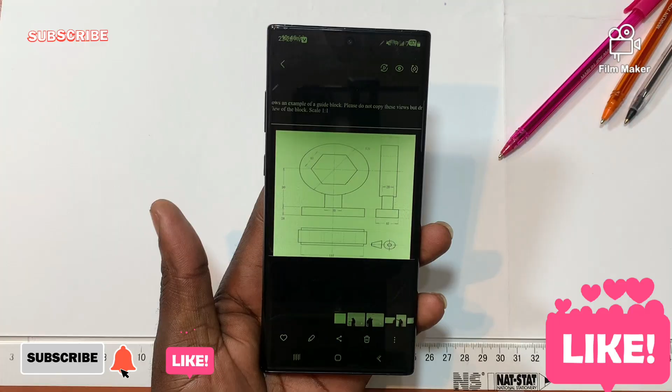Unfortunately, I didn't manage to get the printout on this particular one. So this is isometric drawing.

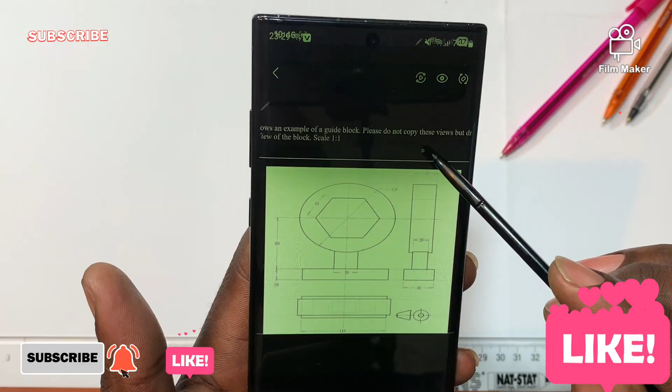We are given 3 views, so the complete 3 views, you understand? According to that symbol, this is the first angle orthographic projection symbol, which means that's your front, your left, and your top. Even the question says figure so and so shows an example of a guide block. Please do not copy these views, but draw this view to scale 1:1.

You understand? But what is very much important here is the scale. They are saying draw it according to which scale and the projection symbol. So the scale is 1:1. Even the dimensions, I will try to get them clearly.

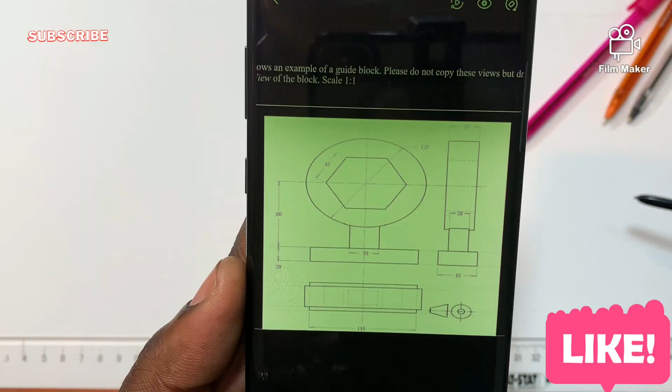So let's start. In isometric, you start with the horizontal construction line like this, out of dimension, isn't it? Then followed by another one perpendicular against it, just a little bit like this. Then where they are perpendicular to each other, that's when I can put this one.

Remember that your t-square must always run along your drawing table, isn't it? Attached, flashing like this, not like this, not like this. Understand? So that the set square must always run along your t-square, whereas your t-square is fixed to your drawing table. If you are using a drawing board, your t-square must always run along that junction of it. It's supposed to be always there, so that the set square can relax on top of your t-square.

So I'll flash down my t-square, and then my set square, I open at angle 30 degrees clockwise. So where they're perpendicular to each other, I'm gonna get this line, faint, and then I am getting this one, faint. So that's how you start to draw your isometric.

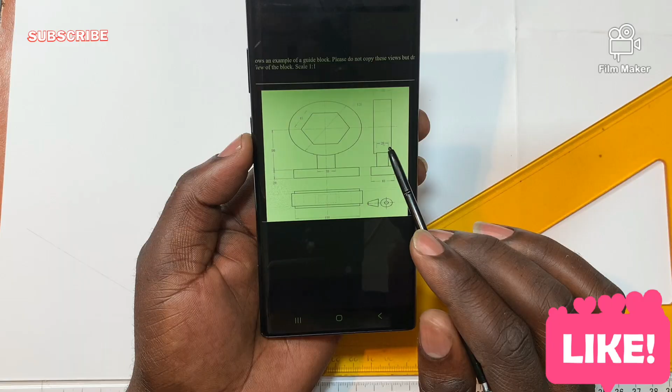Okay, so let me bring back my question. Are they talking about any point being the lowest point there? No, they are not. Okay, so this is my front, this is my left, isn't it? Which means I have to get a shape that is like this way, right on this position.

This position, I must try by all means to get a shape on this position, which is going to be my left view. You understand? So what separates left from right here is the vertical center line.

You understand? So again, on this side, I must try by all means to get a shape of this nature. This shape, I have to get it away on this side, of which they said is your front view. You understand? So that's how you approach a first angle orthographic projection as an isometric.

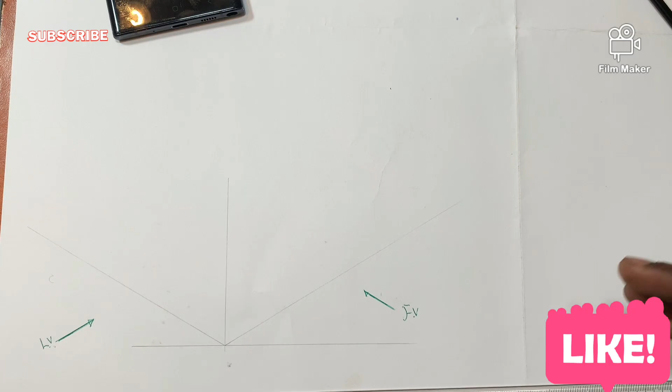Okay, so now I can start with what? So which means with all the dimensions that I'm gonna record from my left, they must be correlated this side. You understand? All the dimensions from my front, they must be correlated this side. And you must know that the front as well as the top will always share the same length.

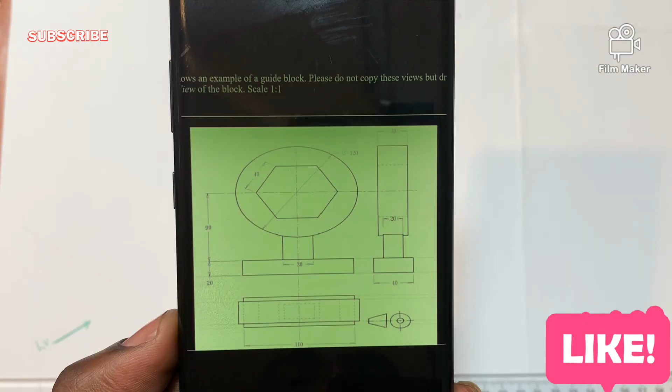So if I'm looking for a dimension going horizontal, I don't see it there in my front view, which means I can go to my top. For instance, from here to there, you see I'm pointing it away. I'm pointing on the front view. So from here till here, it seems to be missing. So I can retrieve that dimension right from my top, because this is front, this is top, this is left. So all the dimensions going horizontal, they will be sharing the same dimension altogether.

So the front as well as the left will always share the same height. You understand? So the left as well as the top will always share the same breadth or width altogether. So I can start how?

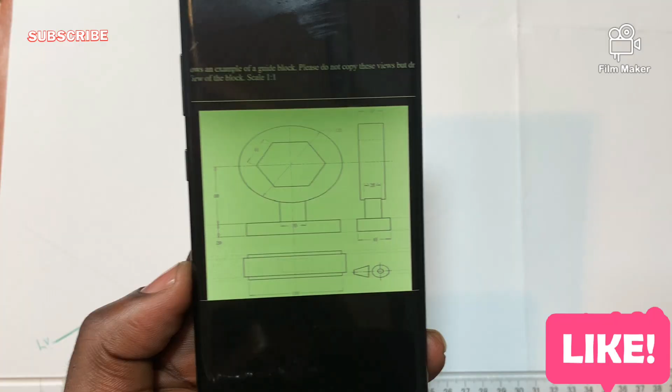I can start with my left, which is 40. From here till there, I now come and record the 40 millimeter using scale 1:1, and it's solid. I can see it's solid, so I can draw it up from here till right there. There is the 40, isn't it? Once I reach 40, what do I see?

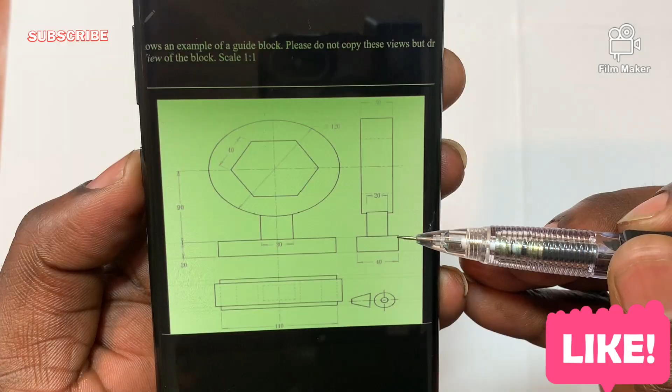Now I see a vertical line going up, which is going to be this one, just a little bit faint, and then up till with a height thickness of 20. So do you see that it's not here the 20, it's not here the 20. I'm actually reading the 20 from my front. So like I've said, the front as well as the left will always share the same height. So it's 20 millimeter.

So this 20, I can record it from here. There's my 20 till here. Then from there, I can simply take this ruler and have a constructional line going this side. Then I draw it down from here to right there, to right here. That's my 20.

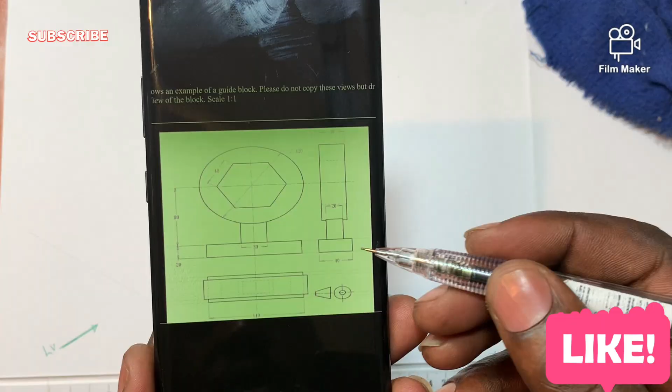So in other ways, I've already gotten this. And then from here till here is how much? Is 40. Let me get to the center of it, the center of it, which is 20. There's the 20, and then I project it vertically up.

So these lines, I don't need them this much long now. These ones and this one, I can erase them before they disturb me. I can erase you, I can remove you.

Okay, so from there, now I'll take this point at an angle of 30 anti-clockwise. Take the center. This one I'll draw it a little bit faint for now, the center. Then I also take this point like this.

So now do you see that I'm going towards my front view? Which means in the question, you can now come and bring it the question. What is the length of it? That's it, it's 110. So from here till here is 110.

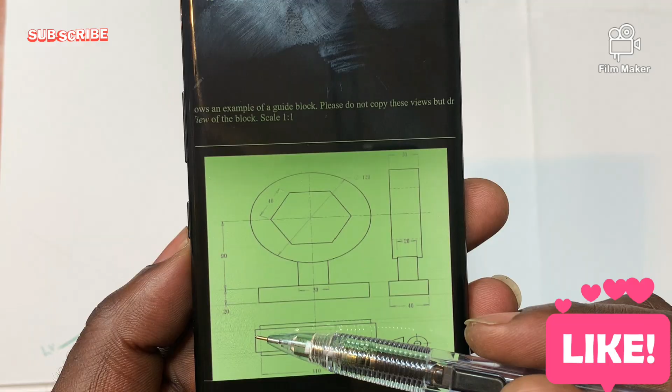And double check what is this one. What is that one? Remember, is your top. You are now viewing it on the top. You can actually see that the 110 is a little bit - there is a dimension that is a little bit going further beyond where your starting point and further beyond you, at the end of your 110 angle. So that one is that diameter 120.

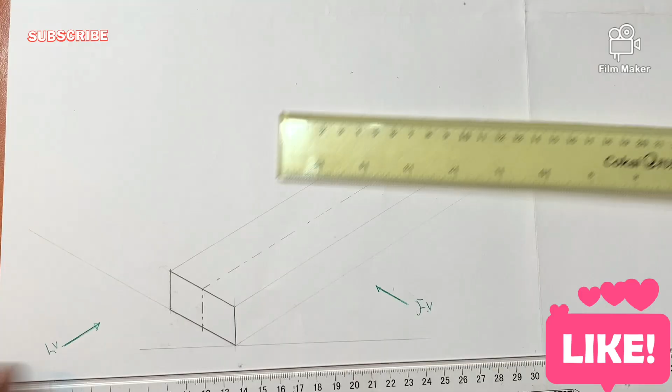So remember, we are starting it from bottom. We're starting at the base. The base of it is of a length of 110. So get it. Zero is my zero.

So 100, 120. I'm looking for 110, which is this one, and I can draw it from here till here. Then what is the half of it? Get the half of it, which is what? Which is 55. 110 divided by 2 is 55.

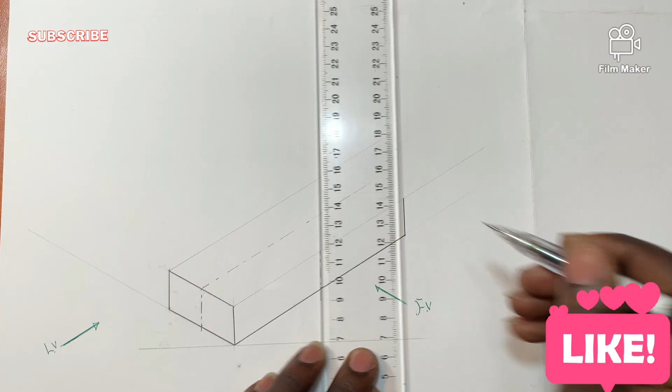Then from there, I'll also get its center. Then have this one solid, and I can come back and have this one dark now, and get the center of it just a little bit faint for now. This one, have it faint. So it's very much important to let this one be faint and let this one be faint. Understand? For now, very much important to understand that.

Okay, so after this, bring back my question. What is happening now? Okay, so from here till here seems to be not given, right? So where your 20 ends, they said to go up with what? With 90. Go up with 90.

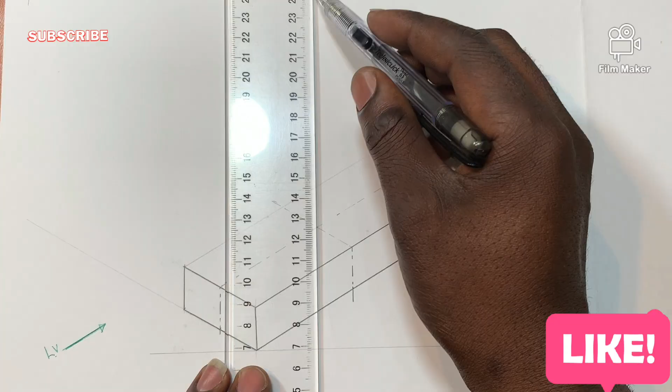So now the 90 millimeter, that's where the trick of this one lies actually. So come and record this 90 millimeter right from this top part of your base. This one, where this center and this one, they are colliding each other. So go up with the constructional line. Go up, just faint like this.

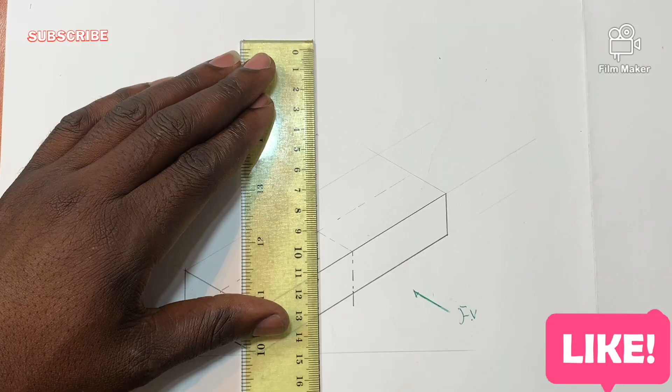Too close, you have to be careful. This thing of drawing during the night. Okay, so it's what is 90. So I'll come and record the 90. This is the 90. So I mark 90. Understand? So from here till is the 90 millimeter.

Then once I get the 90, what am I gonna do now? I can even erase now because I've already gotten, there's the 90, isn't it? So if it's further going up, I can erase it. Just erase it up to where your 90 is ending. So now at that 90, I can draw this center line.

Draw it a little bit long, a little bit long, a little bit long, the center line. And then, which is the same as that one, isn't it? And draw this one that goes like this. Okay, so once I have that, bring back my microphone.

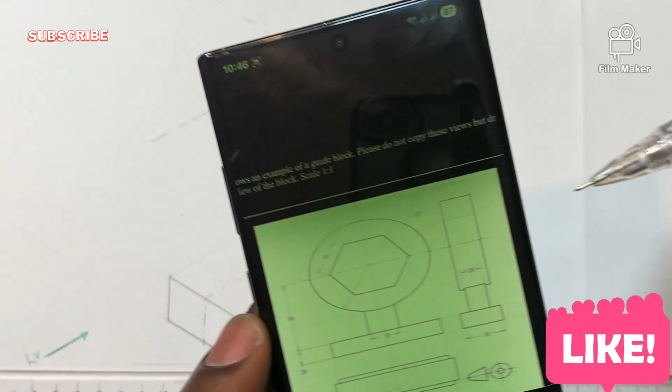Okay, it's of a thickness of what? Of 30 millimeter. It's actually of a thickness of 30 millimeter. So the center, I'm gonna say 15 this side. Remember they say use a scale 1 is to 1. So I'm gonna say 30 and 0, because my half is 15, isn't it?

There it is. Then from there I'm gonna have a constructional line that's going to behave like this, and another one that's gonna behave like that. Everyone. Then from there, what is going to happen now? Bring back my question. So we are going to be advisable to start with what?

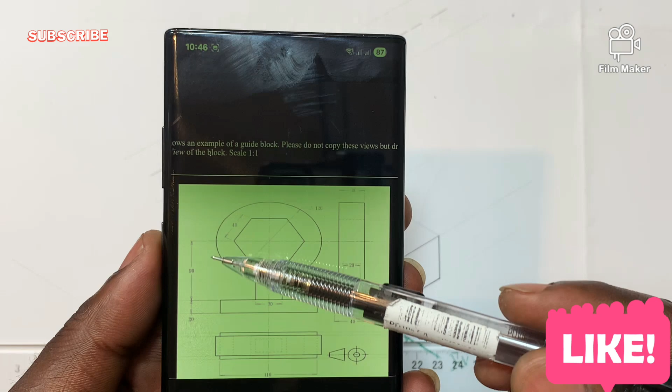Let me double check. From here till here is the 90, isn't it? It's the 90. So there is a diameter 120, and that 90 is actually ending at the center. Okay, let's go up, which means we're right before. Go up like this, just like this for now.

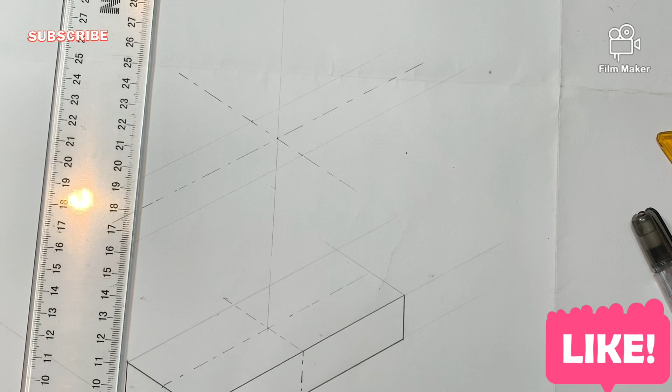Okay, it's just a little bit, and then at this one, remember that from here till here is what is 15. From here till here is what is 15 again. So this one is the one that is going to be the outer center line, the outer center line. This one.

Outer center line, so that one is going to be at the back. Now I can have this one faint, actually a vertical center line this way. Vertical center line, that's going to be like this. Okay, so now after that, if this one is behaving like this one of yours, I can just erase this one.

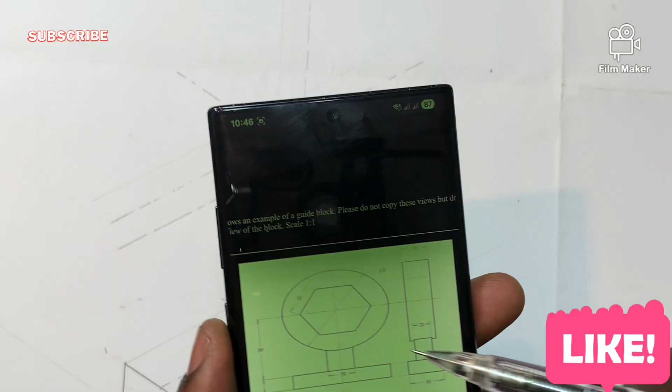Now they are saying this diameter is diameter 120, isn't it? So if you say 120 divided by 2, you're getting your 60 on the drawing compass. Then you place it at 0, further extend it to 60, which is the half of 120. There is my 60.

So you can decide to mark this point R. Understand this point R, how did you go to this R? From here till here, way from here till here. How did you go to even this point? This point is the center of this and that, then you took it like this. Then this center of this point and this, we took it like that, where they are perpendicular to each other.

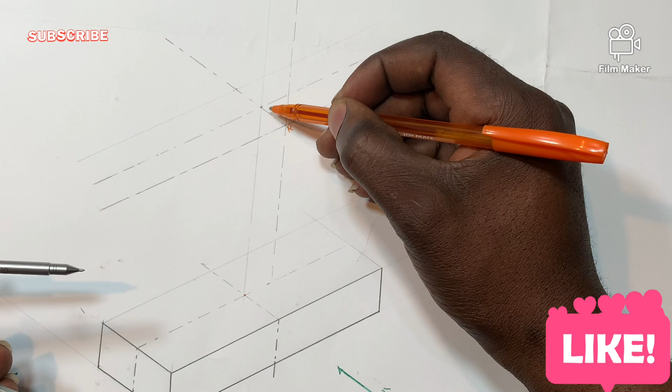It is at an angle of 30, anti-clock and clock, then we took it vertically up. So we recorded, we're told right from the given view that from here till here is what is 90, isn't it? After we got the 90, then we look at the thickness of it. We could see that it was 30. Then we divided the 30 into 2. So from here till here, half of 30, from here till here, half of 30.

So the one that is up front, the one that we are relying on, once we got this 30, then we draw the center, then we draw the center, so where they are perpendicular to each other, that's when I'm saying is your point R. So place it at R, then mark, that's your 60. From here till here is 60.

Then you strike an arc on the side, 60. Then you strike an arc on the bottom one, 60. Then you strike an arc on the upper one, which is 60. Then from there, now I can do it now. I can simply take this point from here till here, just horizontal, which is that point, isn't it? Then flash it up to that other one.

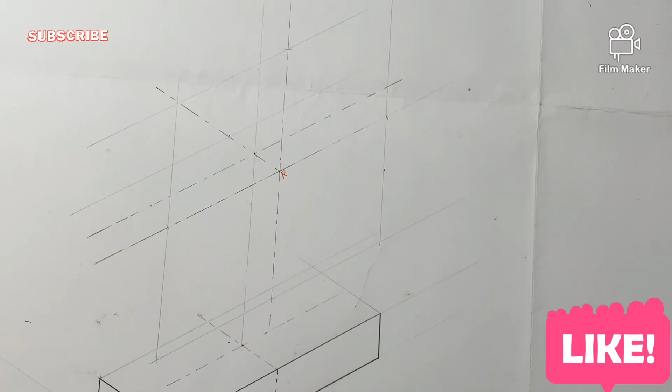So up until it crosses this line of yours, that goes. Then the last one from here, that goes. So you can actually see we've got a square now. We are now having a square. So the square, this number, this square point, so that we are not getting lost.

So I'm going to say this is the square, which is corner 1, corner 2. Then that goes is the center, that one. Corner 2 is the center. So here I have to further extend it just a little bit. This, then that's going to be corner 3. Then after corner 3, that one, corner 4, then back to corner 1.

Then from there, these corners, they've got their centers, isn't it? So I'm going to say this is center A, that one is center B. B, 3 to 4, there is a center which is center C. 4 back to 1, there is a center which is center D. So I'm having center A, B, C, D.

So now I'll take my 30cm ruler and join the two in this opposite corner. You know this method, I've been preaching this method, so that is why now I don't explain why is it like that. So 1, 2, 3, so you can actually see is passing your point R. Understand, 1, 2, 3. Then from there, join the corner to center, center to corner, which is going to be 2 with your D, and then B with your 4.

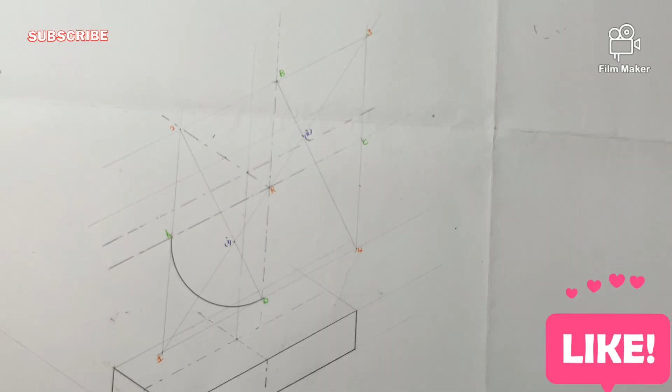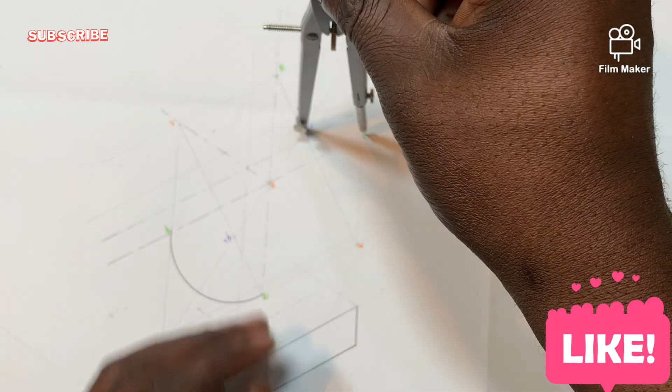This is my A. I'm supposed to be striking an arc from A to D, so that goes solid like this. Then to get the one opposite to this, I'll place it at Roman figure 2, further extended to B. This is B to C, to close it just a little bit.

B to C, there it goes, like this. Then after that, to close it this side, I'll place it at figure 4. Let me see, is it going to reach there?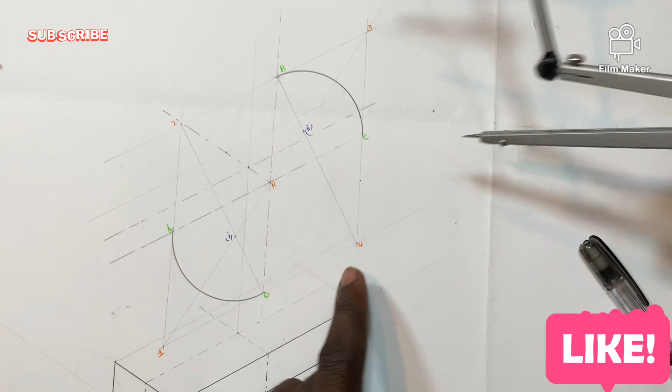Figure 4, point 4 to A and B. Small, so take this one. 4 to B, which is 4. Place it at point 4, further extended to A and B. So you draw, that goes. Draw it dark.

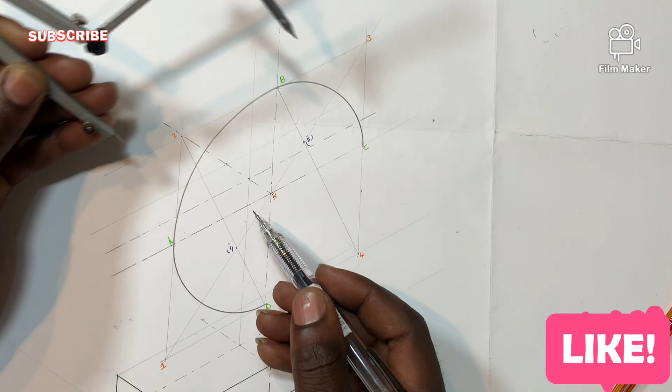Like this. Then now to close it down here, where you're going to place it at figure point 2, to close this side. Remember how to go to this one. Place it at point 4 to A and B, isn't it? So now to close it to this side, I can come and place it at point 2, further extended to C and D. So I have to adjust it.

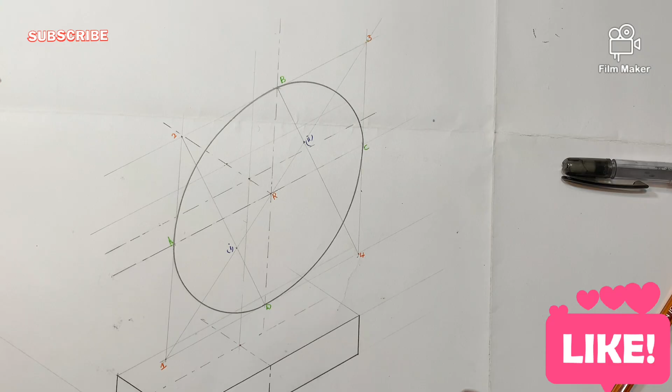So now draw it dark, there it goes, that goes like this, and just like this. So like I said at the beginning of the lesson, you first try by all ways to get this shape exactly. You see the shape of your front view at this position, this side. That is why I even marked front view for you here.

You understand? So we've already gotten that diameter of 120. However, inside it has got a hole. This is the hole, throughout, of a shape of a flat hexagon, a flat hexagon. Which means we have to draw the auxiliary of this hexagon, and then after we get it, we record the dimension and put them in our drawing. So it's up to us whether we finish it.

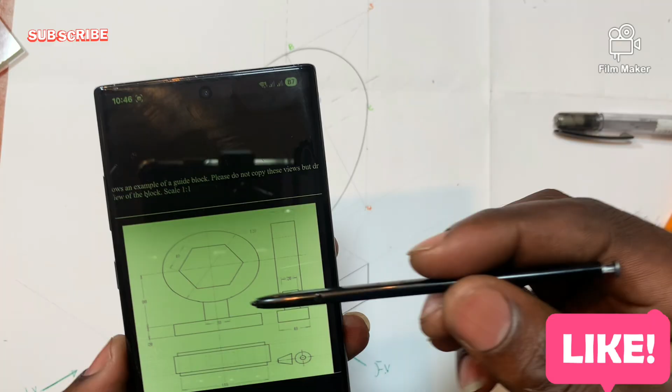Let's finish with it, put it at the end. For now, let's get rid of what we are. Let's get the thickness. That is why at the beginning of the lesson I told you that here and here, don't draw it dark for now. So now what's going to follow is that put this aside.

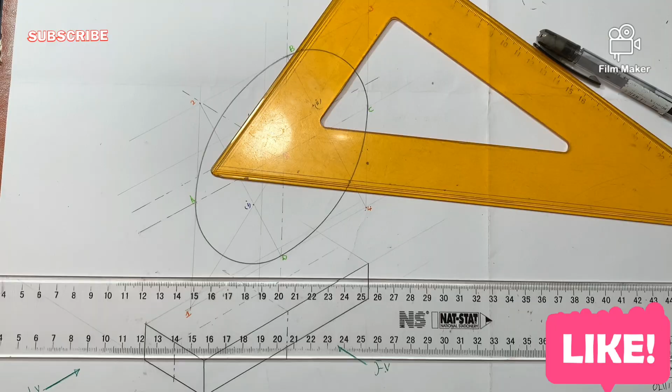Okay, so let's get to the thickness of it. How do you get the thickness? So I'm going to draw a tangent. Remember, I double check your T-square, it is always flush on its junction when you're using a drawing board. When using a drawing table, your T-square mustn't be like this, mustn't be like this. It must always be so that you don't flash it up.

We are going to draw a line. In mathematics, they call this type of line a tangent, going this direction. And when drawn correctly, you'll learn that this tangent is going to start exactly at that point of 1 and 3, just a little bit faint, you understand, and then take your point B.

Remember, point B is a center, so you draw it like such. And again you point, what? Point A, which is the center as well. And then as well as a tangent below here, which is going to be exactly on top of that line of 3 and 1, okay.

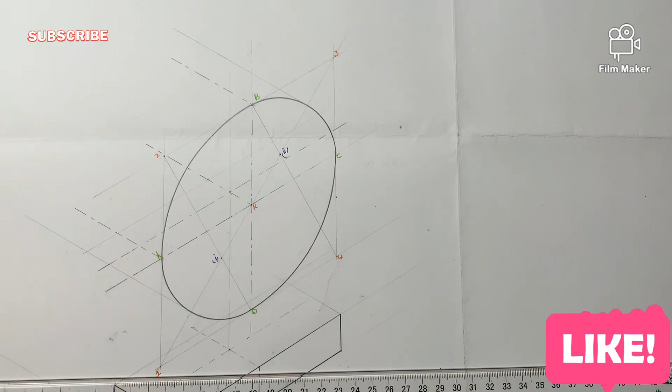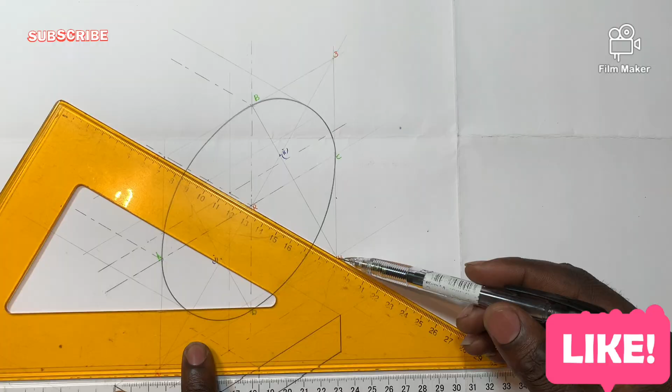So now we come back and ask, how did we draw this arc? Let's ask ourselves, how did we draw this arc? Okay, like I was saying, how did you draw this arc of point A, B? Ask yourself that. I drew this arc of A, B, placing my drawing compass at point 4. So point 4 is the one you're supposed to also construct back, just a little bit back like this.

Then after I've constructed this, I come and read what's called the thickness. The thickness, what is it? The thickness is 30 millimeter. So you can actually see the thickness is 30 millimeter. So we're given that is 30 millimeter, using scale 1:1. Then I'll come right from point 4 and record the 30 millimeter.

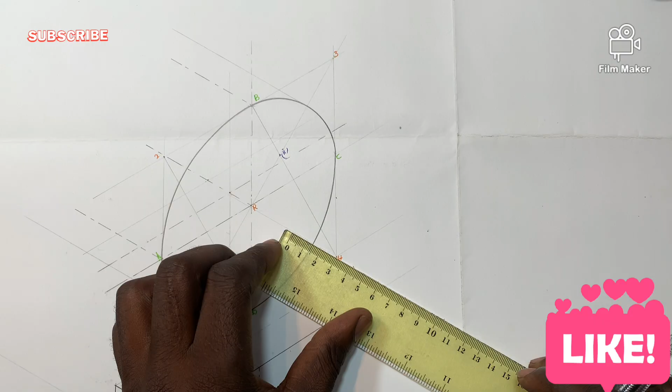Which is from here, from here to right there. Understand? Then from here till here, that's the thickness of 30 millimeter. So now I come and ask myself again, how did I get this arc of AB? Okay, I was placing my drawing compass at point 4, further extended to A, and I got it like this. So now I'll come and place it where my 30 millimeter is ending, along this line.

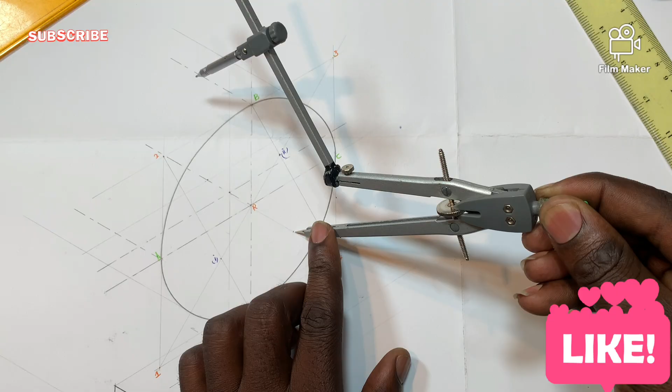Remember how I drew this line? I drew it at this angle, 30 clockwise, isn't it? Then I recorded the thickness. Then I come and place it where the 30 is ending, which is this point. And remember how I drew it? I started here till here. So which means even this one is supposed to start here till there. You get it? So do it, solid, dark. There it goes.

So that's how you draw a parallel arc. You stick to your references. You understand?

Where's this one? Where's this one? Where are my markers now? Okay, so this one is going to be the A at the back now.

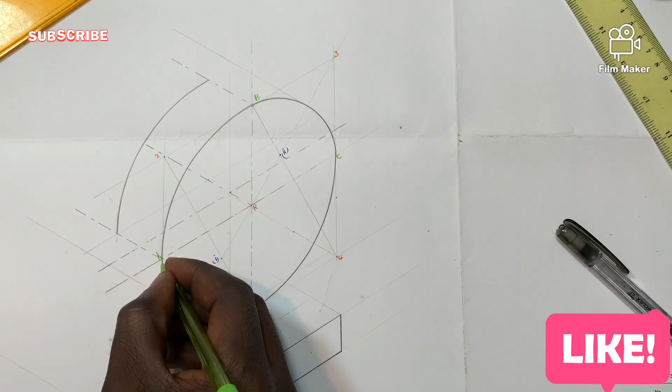The A at the back. So that one is going to be the point B that is at the back. You understand? So this is going to be now the point 4 at the back there. The point 4 is now at the back there.

You understand? So from here till here, we are not going to have it solid. From here till here, going to have it solid. And then now you can actually see that there is something that's supposed to happen here. So you have to get another arc here that will be parallel to this one.

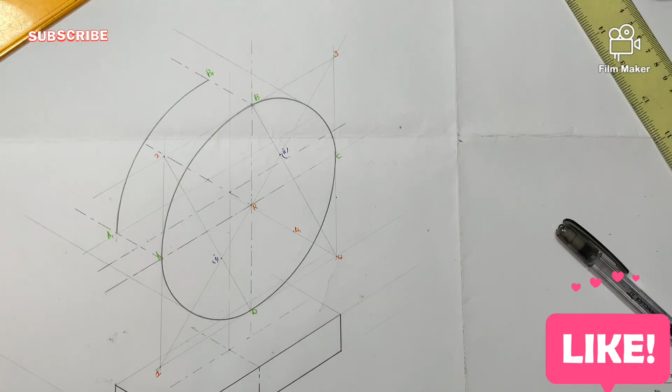Then you come back and ask yourself again, where were you placing your drawing compass the time you drew this arc? Okay, I was placing my drawing compass at Roman figure 2. So which means it's the same Roman figure 2 that I have to construct it a little bit back, faint, like this. There it goes.

Then now I bring my drawing compass. Let me take the smaller one. Where is it? Where is it? The small one.

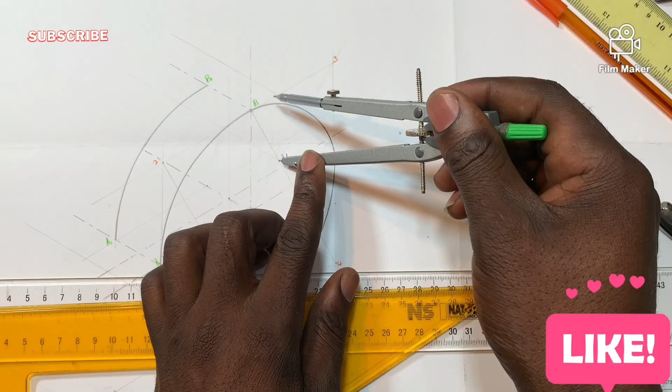And I come back to record it. Okay, I got this arc of AB, BC now, by placing it at Roman figure 2 like this. So there it goes. Okay, I got it like this. Then now I have to take it a little bit back.

With what? Remember what you did with your 4. From here to the 4 that is at the back is how much? It's the thickness that is given from the question, which they said is a thickness of 30 millimeter. So I can come, just place it here so that you have first from here till here.

Then now come and place it at Roman figure 2 and mark. So which means the Roman figure 2 that is at the back now, it will be right there, which is Roman figure 2 at the back. So now I have an idea that okay, I'll be placing my drawing compass here, further extend it to point B.

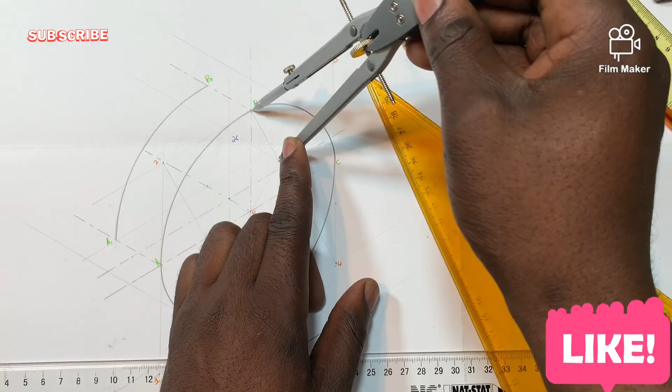Let me double check again. Okay yeah, I have to open it just a little bit. A, B to C. So now I'll place it here.

There's my B. Once it touches this line, I stop. Then I draw it solid. Once it touches this line, I stop. I don't pass. You mustn't pass. Once it touches this line, I will then stop.

So then have this line as a little bit solid. You can actually see. So that's how you go about it.

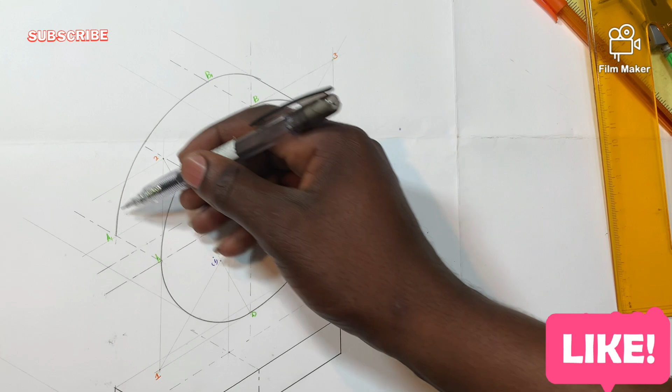The trick here is to be very accurate. You have to try by all means to be accurate. Okay, so what you did here, you're going to do it here. Ask yourself, how did you draw this arc?

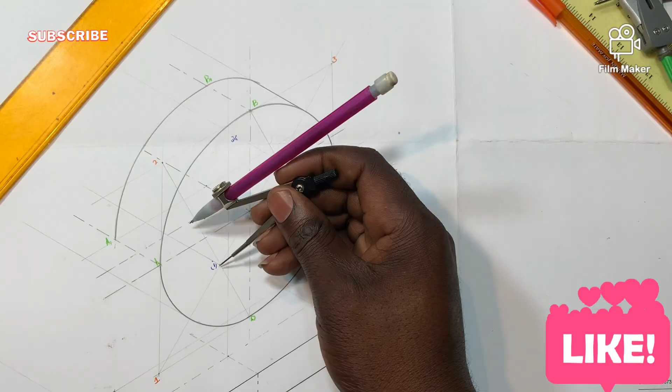Okay, I was placing it at Roman figure 2, Roman figure 1 now. So it's the one that I'm gonna take a little bit back. Then I come back and get the thickness again, which is 30 millimeter. Then come and place it at Roman figure 1 and mark there.

Now I'll come and place it here at Roman figure 1, that is at the back. Starting to draw it right from here. Once it touches the line, which we are saying is a tangent, I will then stop like this. I will then stop. You get what I'm trying to say?

Then from there, it should be a little bit of a straight line there, which is going to be something of this nature. So the trick was actually here. Understand? This is grade 11 in Engineering Graphics and Design as far as I'm concerned.

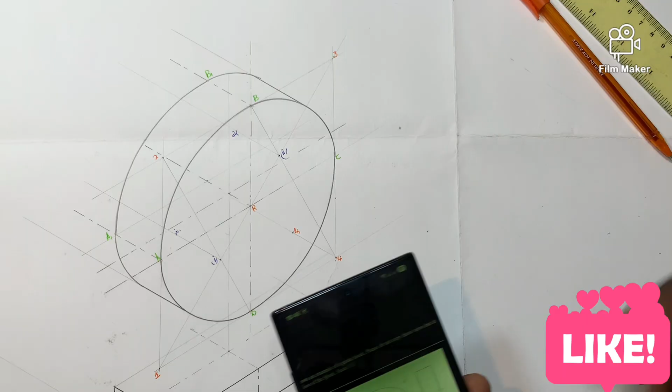So you can double check that we are given, like as I've explained at the beginning of the lesson, that we are having a hole. This hole is in the shape of a hexagon, flat hexagon, not across. If it was standing like this, we would have said across the flat hexagon, but then it's like this. So we'll have to draw the auxiliary of it. So a little bit up there, you have the whole space of drawing it, isn't it?

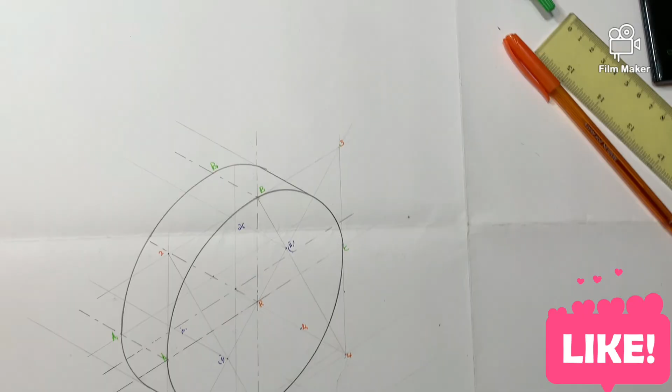So let's draw it here. Then after we drew it here, we take dimension to it. Okay, so you know how to draw a hexagon. You've got your own method, whatever method you prefer, the quickest accurate method of drawing the hexagon. As long as it's a correct accurate hexagon, you know the properties: all the sides must be equal, and it's supposed to have 6 corners. Okay, so how am I gonna do it?

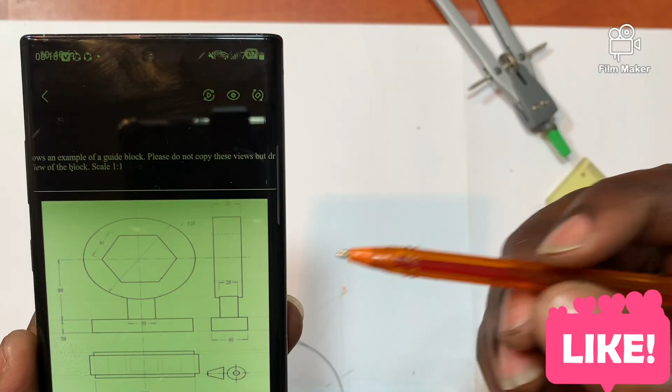The first is, okay, I want to draw a hexagon of 40 millimeters. So I'll simply take my drawing compass and open it to 40. Where is my 40? This is the 40. What am I gonna do with the 40? I'll simply draw a diameter. Because when it's like this, it's as if I've just set the 40 as the radius. And then I'll draw the vertical center line.

So that goes. Once I get there, take this one away. Okay, so I can simply get the horizontal center line of it. That's it. So now, since they set it, it's a flat hexagon angle.

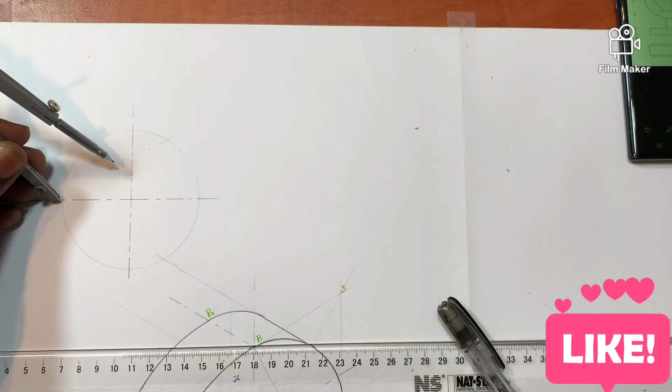So I'll rely on the horizontal. Just place my drawing compass here, this point, further extend to the center. I strike an arc here, strike an arc here, then do the same thing on this one: from here to here, strike an arc here, strike an arc there. So now I can have this one from here to the mark, from here to the mark, from here to right there, mark, from here to right there, solid, from here to right there, solid, from here.

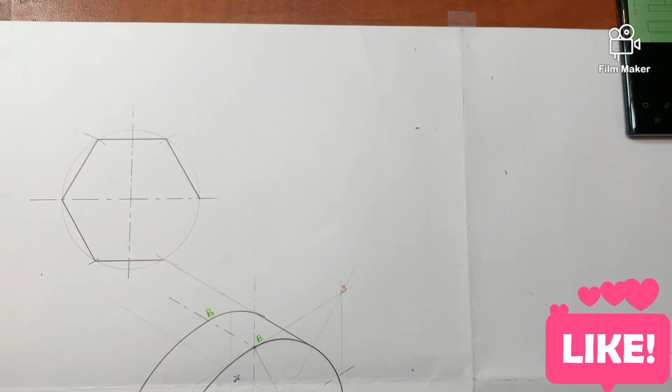Let me emphasize this point. Can I have your attention? I've seen learners when they are joining this point, and it's not my first time addressing this. Please be careful. We firstly draw the diameter of that particular radius because we want to get a hexagon of 40. You understand? So when I come to your work, from here till here has to be the same as from here till here. And the point I want to emphasize is that I used to see students joining this with that, joining this with that.

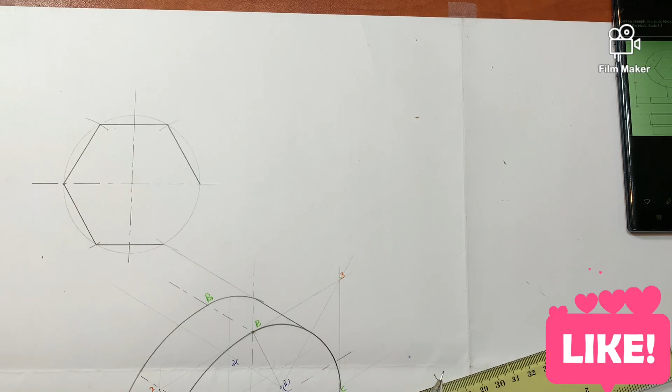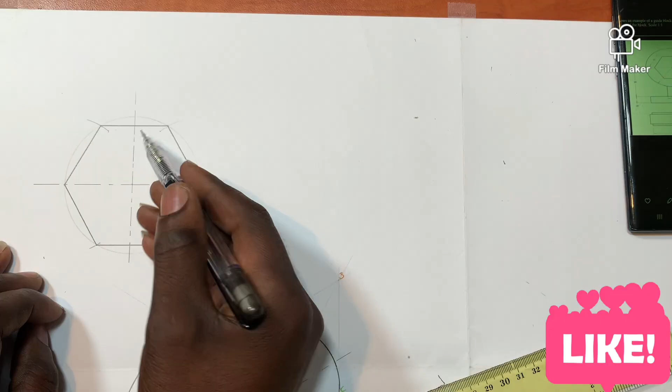You understand? Sometimes they'll even be joining this with that. On which ground are you doing that? You don't do it like that. And remember, you are striking your arc - an arc doesn't have a dimension. Let me put it like that. This is an arc. An arc is actually giving you a point. An arc has to be bisecting with the second so that it gives you a point. So if you are joining here like this, I used to see learners doing like this.

No, it's wrong. You see, now I'm even spoiling my life. It's wrong. On which ground? What if I decided to stop this arc here? Which means we would have joined with that? No. You stick along within the circumference of the circle. That is why you firstly draw the diameter. Then your points must be on top of the circumference of the circle.

You understand? That's how you do it. So I'll join this corner with that one, not this one with that. Understand? So join it. There it goes. This is our flat hexagon. Now let's see, is this 40? This is 40. So which means we are correct. You understand? Which means our hexagon is correct. And this one is the same as that one. Is this 40? This is my 0. There is my 40.

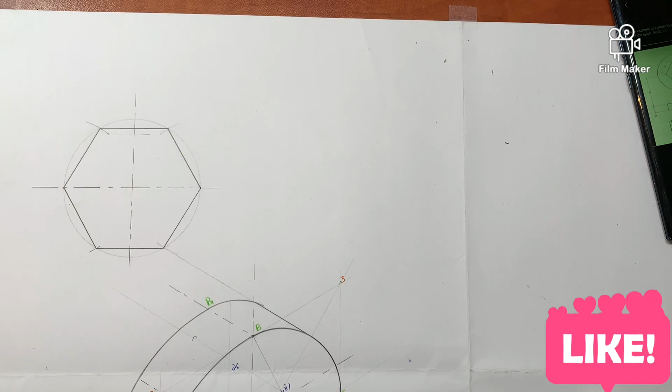Is this 40? There is 40. That's what I like about drawing: you can be able to mark yourself before you even submit your work to your teacher. You can be able to scrutinize to say, is this correct? As long as you know your grounds. Is this 40? Those must be the same as this one. That one is 40, my brother. You understand? So, which means our hexagon is correct, because they said to draw a 40. Okay? So now, let's come to our work.

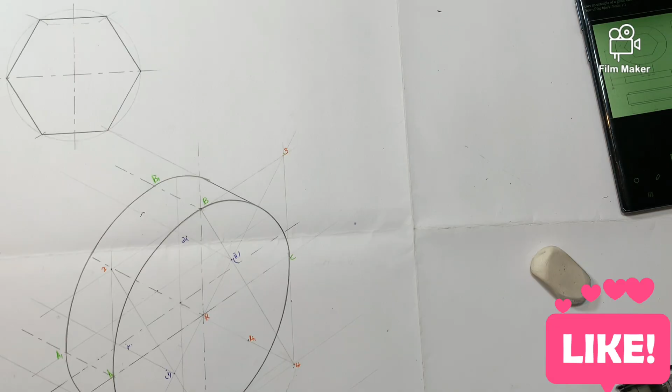So from there, double check, what did we set? We said we are having an R. I try to whisper, because I'm actually drawing it at night, you understand? So now I said we have this R, right? So in our auxiliary, that R, my brother, is going to be that one. So what are we going to do now? We are going to take the dimension of this and put them here. How? By using a drawing compass - it would be faster using your drawing compass. So come and place your drawing compass at point R.

R, there by your auxiliary. From R to this point, because from here till here is the same as from here till here, so I can just place it in one side. Further, why am I saying it's the same?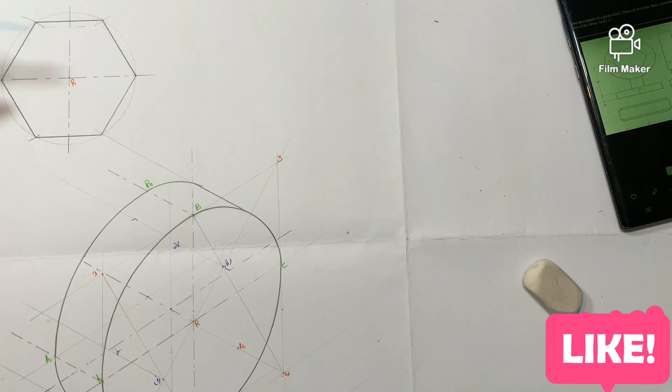Remember how to do it. You firstly draw a circle. You see that is the same, still the same, isn't it? From R to this point. Then remember that at your auxiliary you place it from here till this side, isn't it? So I'll come and place it from here, then I mark, and I mark.

You understand? So for the point, for the sake of better understanding, let's number our corners here. I'm going to say I am having a small letter A, B, C, a D, E, F, right from the auxiliary, right from the auxiliary. So I'm having A, B, C, D, E, F in small letters and R.

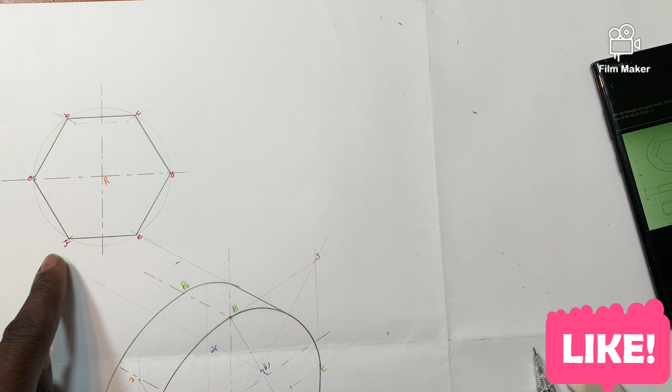I've explained that this R is the same as that one, you understand? So if I place my drawing compass from R to D, so that we don't say that point, no, I'm talking about that point, not that one. Let's give them names, so that I'll be saying R to a small letter D.

So R to a small letter D is the same as from R to small letter what? A, and it. So now move from R to small letter D, which means in our solution, our small letter D is now right there. I am getting it there. And from R to small letter D is the same as R from small letter A, which is small letter A, right there.

Okay, so now come back to your auxiliary, place your drawing compass from R to the height of your hexagon, flat hexagon, which is that one. You understand? So now, without disturbing your drawing compass, come. Place it at your R vertical angle. You mark it here. You mark it right there. You mark it here vertically on your line, on your vertical center line of DB.

So remember, this is that one, this is that one. Okay, then after I've gotten that, I'll then just have a constructional line again. That's going to be like this, constructional line, and another one that's going to be -- don't be confused by your own work, by your own lines. Treat them one by one, point by point. Okay, so from there, what are you going to do?

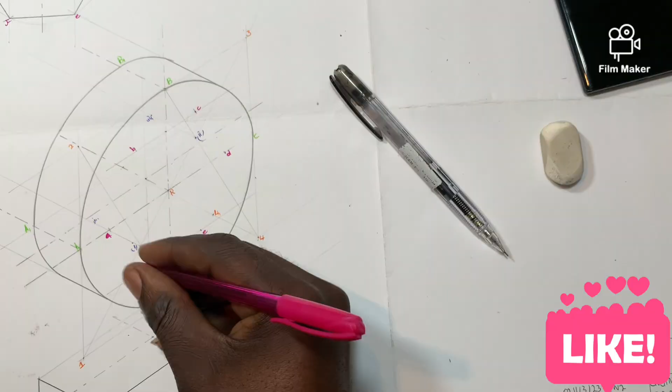Okay, so from there, my guy, what do you do then? I'll just take my 30cm ruler and have this line, 30mm ruler. I'm joining A, small letter A with the B, solid. So there it goes, solid.

Then from there, I join point B -- this one you can even use your set squares -- to C, solid. And then I join C to D. Then I join D to E. Then I join E to F. Then I join F back to point A. This is it.

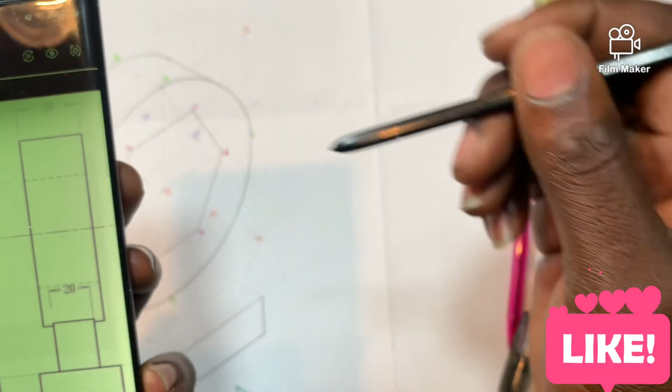So I'm going to take point E, just a little bit, and point D, just a little bit. Point F is impossible, point A is impossible. We're talking about hidden details that the question says not to show. So I'll come and get the thickness now, which is 30. If you've forgotten it, you can go back to your 30cm ruler. Then I'll place it at E and mark it, then place it at D and mark it. So this one, EF, is impossible.

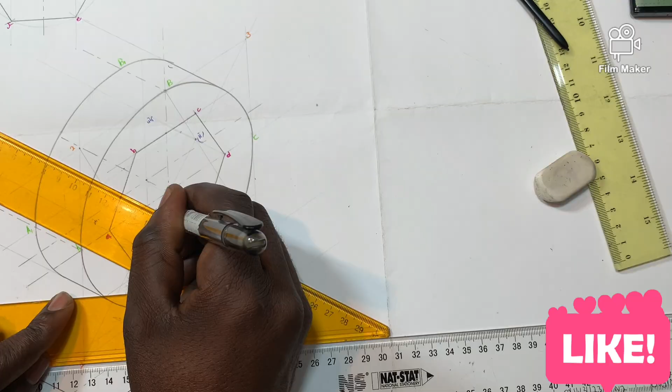So now I will draw from E to that point of mine. This is going to be point E at the back. So point D till that ending right here - that's our point D at the back. Can I join this E at the back with D at the back? So from E to F that is not visible, it will just be a line at 30 degrees anti-clockwise, parallel to this one. This center will be right there.

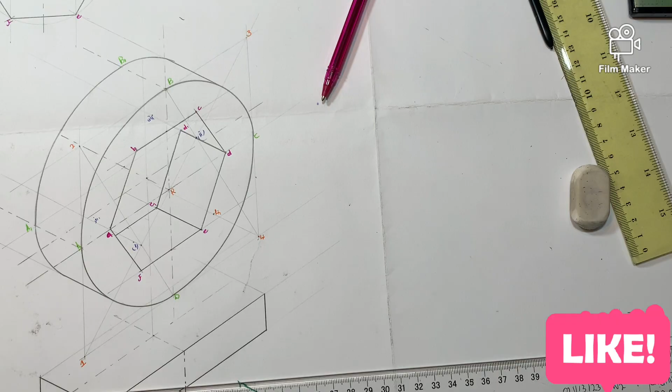There's no need for us to draw it. So there will be another line a little bit parallel to this one. You can use both of your set squares like this - you know this method. I'll record the straight line of CD like this, then hold this one steady, and flash this one along till that point I'm looking for, because it's supposed to be parallel. So I can have it solid like this. Simple, eh? Just a little bit like that.

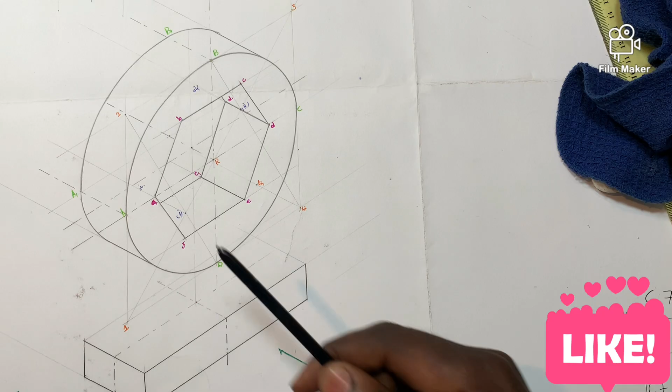I think the trick I've already gotten into. Are we done? At the beginning of the lesson I said this one, for now, don't draw it dark. You can actually see there will be some lines at the back there. So let's finish faster.

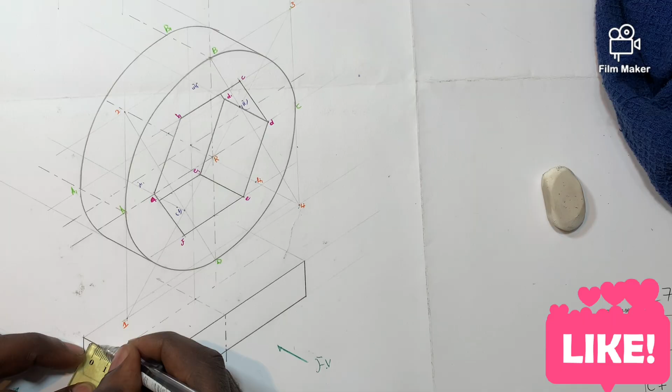So we are given the thickness of it. Double check it - the thickness is what? Is 20, isn't it? You can actually see it is 20. So to get that 20 nicely, come and record it right from your left view. From the left view, 20 divided by 2, I'm going to get it right there. So it's going to be 10 and 10, isn't it? Once I get that 10, I will take it - there goes faint.

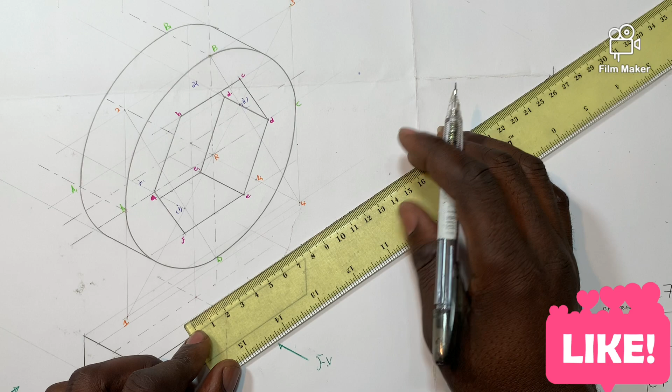That goes faint. Okay, so come and double check on its front. On its front is what? Is 30. So from here till here is 30. So 30 divided by 2, I'm going to say what? 15 this side. Where are we? Right there - 15 this side and 15 the other side. Where is my 30, which is from here till right here? You see what else I'm recording? I'm also drawing, you understand?

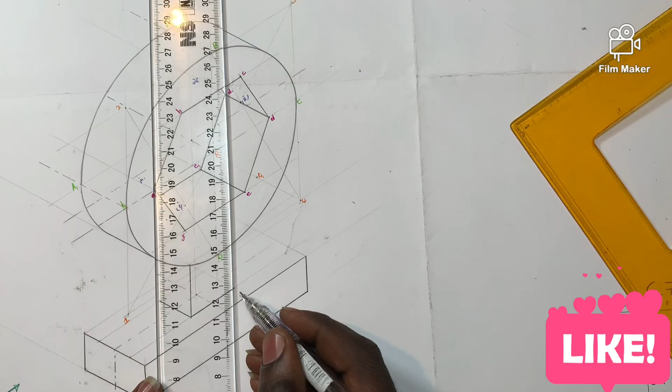Then after I've gotten like this, I'll have this one solid from here till there. This one is not going to be solid - it will be a constructional line, isn't it? And from there it's gonna go up to right there. As much as you can see, it's clearly going up from here till there, tiktokers, you understand? So even this one is gonna go up to right there.

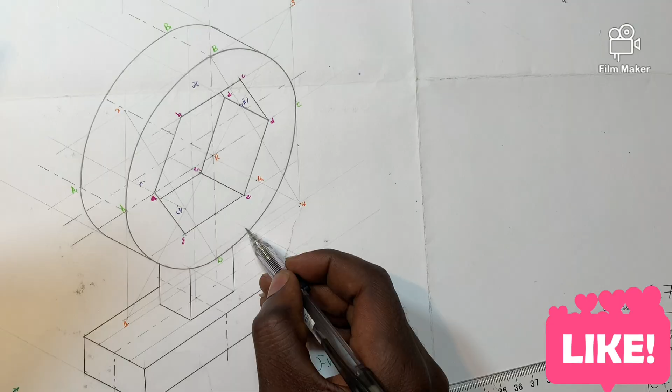So then I can now come and finish what I've been saying. Is this one going to be finished here? How is it going to be finished? So it's going to go till at that point, isn't it? So which means this side can go to such an extent. So are we done now? As far as I'm concerned, we are done.